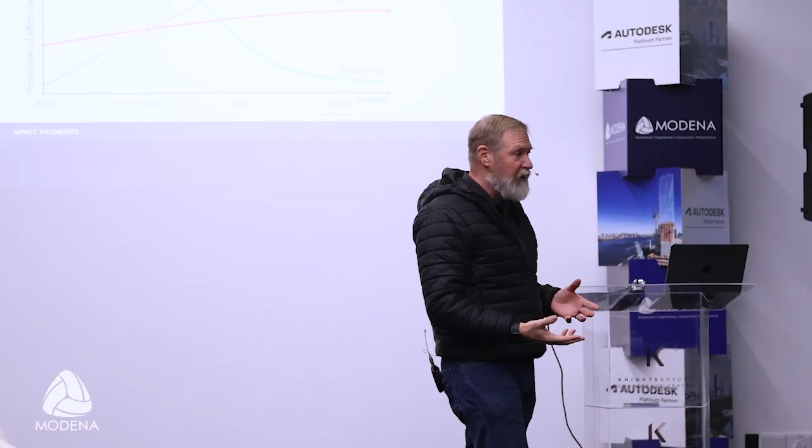That's going to continue, but it's not going to increase as fast as data. And when we talk about data, whenever I hear someone talking about data, I always want to say, what do you mean? What is data? Is it just ones and zeros? Is it documents? Is it pictures? Is it videos? Is it models? What is data? The answer is yes - it's all of those things.

But when that stuff is badly structured, it's not worth that line. And that line is important, because if that information and data is of good quality, then those bits over there that represent AI start working.

AI consumes data and reprocesses existing information to create new stuff. If you've used ChatGPT or Copilot or Claude or one of those things, if you've used it properly, you would have realized that garbage in really produces garbage out. I mean, that machine can do whatever it likes, and you wouldn't be any the wiser. But when you start using proper prompts, when you start feeding those algorithms with the information you wanted to use as raw material, you really get gold.

I've used that extensively in my research just for today. The augmentation of my knowledge on the subject and my ability to ask the right questions of the algorithm, and point it towards the right source data, meant that I could accumulate information that I'm going to present to you reliably, with cross-references that I checked, in a very short amount of time.

Now that's important, because we're very busy these days, and our projects are getting bigger and bigger. We have less and less time to faff around trying to find stuff. But it means that as we start leveraging technology, we've got to be cognizant of the quality of information and make sure that we spend a lot of effort in that space.

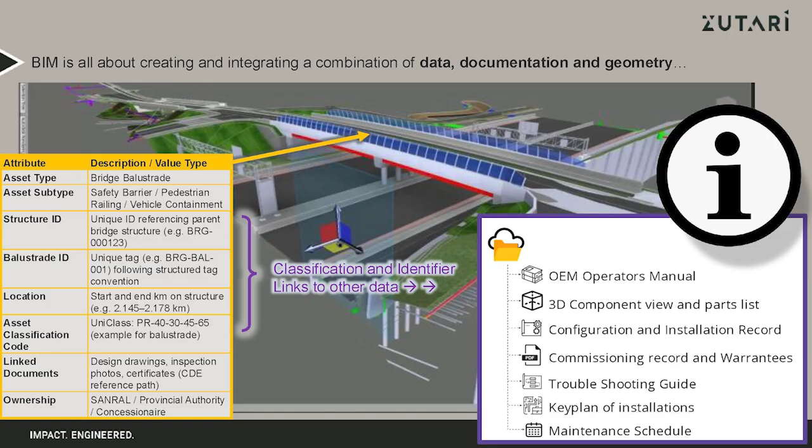When we start talking about asset information, it's a very interesting topic, because it's a term that we drop into our conversations, but do we really understand what it means? When we look at asset management as a concept, I think many people think facilities management or they think operations. Asset management is a very big topic.

Is anyone from an asset management background in the room? Any asset management? Thank you. Anyone else? All right, plug for you.

Asset managers look at everything, from before a project is even conceived till way after the project is finished and all of us walk away off-site.

That is the realm of asset management. It's understanding how we value and utilize everything that has been created. And so the realm of BIM really is concerned with how do we produce information that is useful in the asset management context. And asset information becomes a critical deliverable for all of our projects.

So we take something like that bridge balustrade. When the National Roads Agency needs to manage their assets and understand where a certain type of balustrade is present on our road network, if they were able to filter through all of their databases and understand where the F1 type balustrade has been used anywhere in the road network because there was suddenly a flaw in the manufacturing, that would be a game changer, as opposed to having to trawl through lots of papers, right?

Even roads. I'm a roads engineer, by the way. This is my happy place.

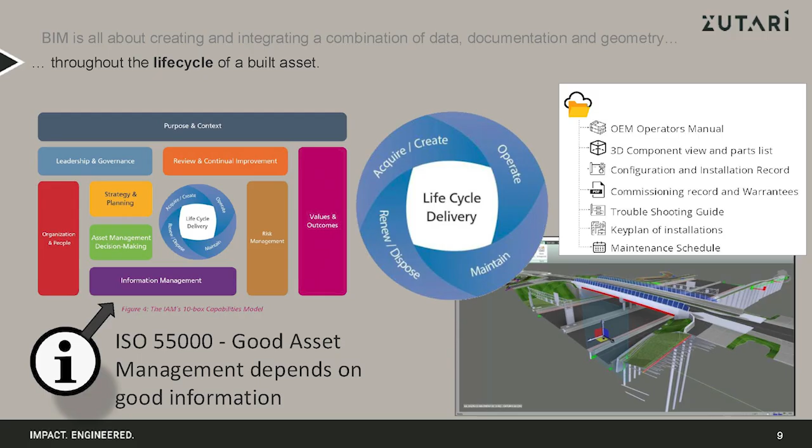Asset management has a very structured and very deliberate way of thinking about how it is done. Right at the bottom of that picture, it's a bit of an eye test for everyone, but this purple block says information management. And that blue cycle that I've enlarged over there is the asset life cycle. Most of us in the room, except for the asset manager, are involved in that blue ring. That's our primary focus, and I'm guessing most of us are involved with the creation of assets.

Who's not involved in the creation primarily, but in the operation of assets? Hands up? Sure. Pay attention to that, because the conversation today is very typical of where the industry is currently.

Most of us are concerned about creating assets. Many fewer of us are concerned about making those assets last. And BIM is about both creating and extending the life of assets. So as we start improving the way we produce information, we actually produce the raw materials for operations and for us to be able to maximize the value of assets. Asset management is about making sure that you get return on investment.

One of the sad things about South Africa is we're brilliant at making, we're not so good at keeping. And we need to get better at that.

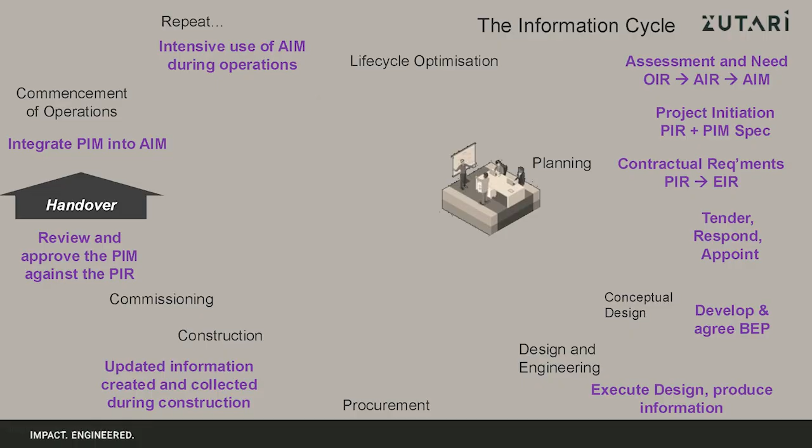There's probably going to be some debate around this point. Some people say the information gets pulled through from the very beginning in a continuous cycle all the way through. That is true, that is called a golden thread. But the information is replaced along the way and updated through a versioning process. The information that we as design engineers create to describe what must be built gets replaced by more up-to-date, more accurate, more correct information during construction.

And that is ultimately what's handed over. It's an important concept to grasp, because the process of project delivery in BIM is almost like a relay race, where different parties are receiving information from a previous phase and running the next leg of that race all the way through.

Through the construction and commissioning process, that information reaches its ultimate pinnacle. Because at the commissioning process, everything that could be known about that asset is known. And a month later, that team disperses, and all of the knowledge that hasn't been captured is lost forever. That is a critical point in history. If we don't capitalize on that moment of commissioning properly, you'll never regain it.

I'm working on a project right now where the client is paying a massive premium because they didn't anticipate this step. But fortunately they realized, and they have the capital to invest, they realized how important that would be. And it's so important that they're investing heavily in capturing that information before it gets lost.

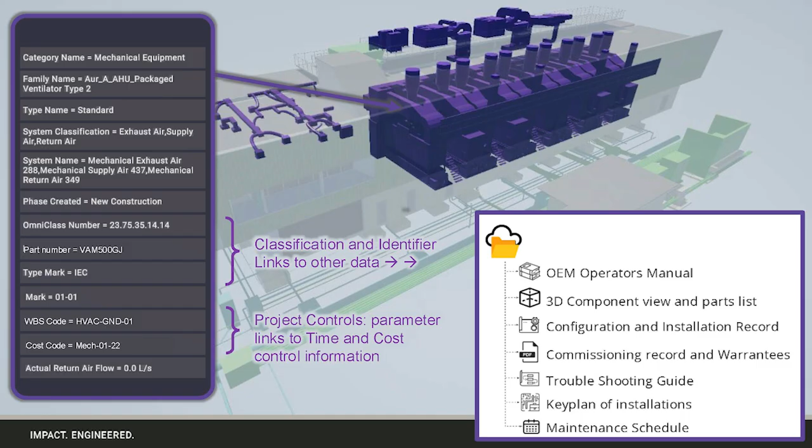Again, projects that we're involved with, where the client wants to do a digital twin - very exciting, everyone wants the digital twin. Digital twins are like that thing on that previous graph that needs to consume data. If the data is poor, digital twin's dead, period. And so this process of being able to create classified, organized, structured information is the beginning of a digital twin. If you don't do that, forget it.

It's a pretty picture. And being able to link documentation, information that describes the assets themselves, information that links to time and cost - you're wondering how to do 4D and 5D, right? Those of you who've heard 4D and 5D, two simple things: a WBS code and a cost code. Stick it in your parameters, you're sorted.

There's a lot of work down the line, but those two little things there unlock so much. The other ones, the classification identifiers, that unlocks your 6D and 7D. You've heard those things - we're going to talk about them now.

Let's compare 3D modeling with BIM. 3D modeling is creating pictures. So our artists used to do that ever since we could animate, and ever since you've been able to draw a 3D perspective, you've created 3D models.

Information modeling is about creating these things - it's about having a descriptive model that describes what you want to build, being able to connect that with information, documentation, specifications, being able to link it to project schedules so that you can actually see how far a project should be at certain stages. Incredibly effective if you've got multiple stages that need to work in the same spot.

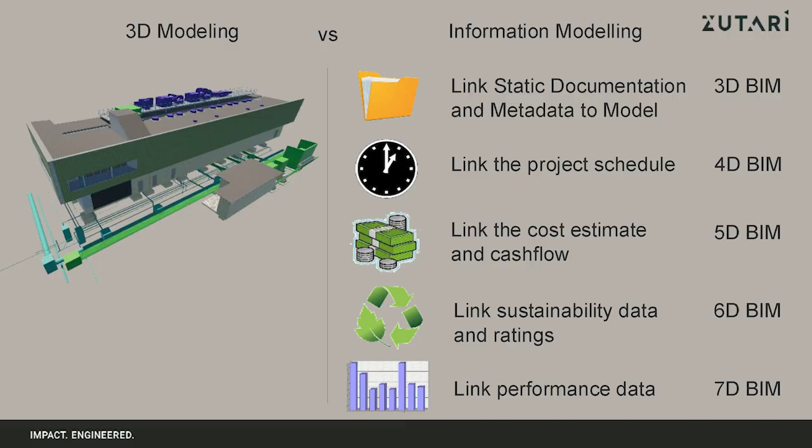Let's look at cash flow and visualizations. I have this picture in my mind of a cost controller, and instead of looking just through Gantt charts and schedules, they click on the payment certificate and up pops the model, color-coded to see what this payment certificate covers.

Clicking on a filter that says, show me the difference between last month and this month's payment certificate spatially. Show me that in terms of time - how much of that was supposed to be last month? Simple concept, two parameters in your model, and an awareness between your modeler and your scheduler. We should be doing this, people. It's not hard - or maybe it is, but you're just not aware of it.

Sustainability ratings - being able to filter through the components of your building and understand where the parts are that are contributing towards a poor or a good score. Being able to then use that information to selectively start replacing during its life cycle as new products become available, as new opportunities come to actually save.

And then asset performance and asset management - the amount of information we can collect and the computing power to process information about performance. In industrial applications, think of a SCADA system, which is like an industrial BMS, and how you can collect information from all over your plant, analyze that. We already do that, but that information sits on a red, amber, green dashboard. Being able to suck that into a database, analyze it for optimized opportunities, and then be able to visualize those scenarios - that's what that opens up.

Interesting thing is, in South Africa, we're not getting this in our tenders yet. The BIM community is working very hard to make sure you do, which means we need to get ready. The tricky thing about this conversation, speaking from a consultant's point of view, is we're essentially writing our own exam papers, and we need to get ready to write the exams ourselves. It's an interesting position to be in, but the privilege we have is we've got time to study, time to get ready. Today is about asking yourselves: what do I need to do to get ready? That's after lunch. But let's first look at what you need to be ready for.

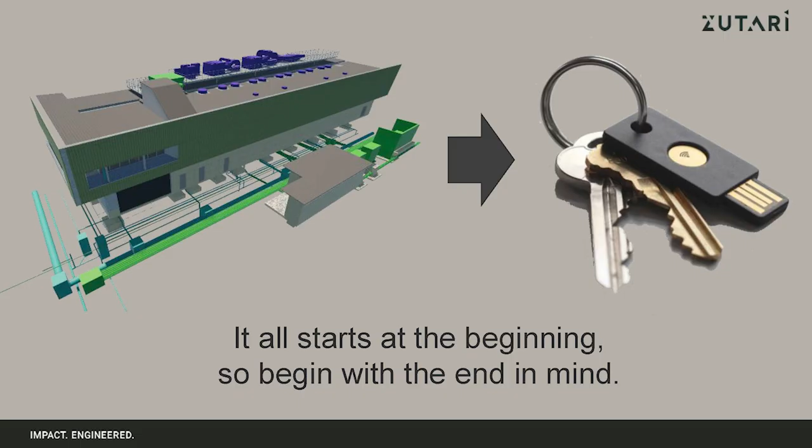So, I love this picture because a friend of mine called Andrew Mason always used to tell the story about engineers and architects that like to toss the keys over their shoulder as they walk out the door at commissioning, and it's the facilities manager's job to catch them and try and make something happen. And I said, well, wouldn't it be cool if that bunch of keys had a memory stick on it and had all the data? It's a very bad image, but I think it's just a reminder to me about how important it is to hand over the keys and the data. That bunch of keys, to me, represents the complete picture, the possession of the physical and the virtual.

All right. So here's a little story, and I'm going to ask at the end of these two stories which one you think is more realistic. So I'll read it to you because it's easier if you hear it.

The municipality of Nowhereyouknow commissions a new water tower to improve pressure for an expanding township. The consulting engineer delivers PDF drawings via email, flag number 1. The architect submits renders. Contractor receives a printed copy of the tender drawings during the site handover. 6 months into construction, the contractor discovers that the reinforcement details for the tower shaft conflict with the embedded starter bars shown on an outdated foundation drawing.

The structural engineer is on leave. The updated drawings are buried in an email thread. The clerk of works is left guessing which version to follow. No one has a consolidated model, and information lives in different silos: emails, desktops, Dropbox folders. Site instructions are handwritten.

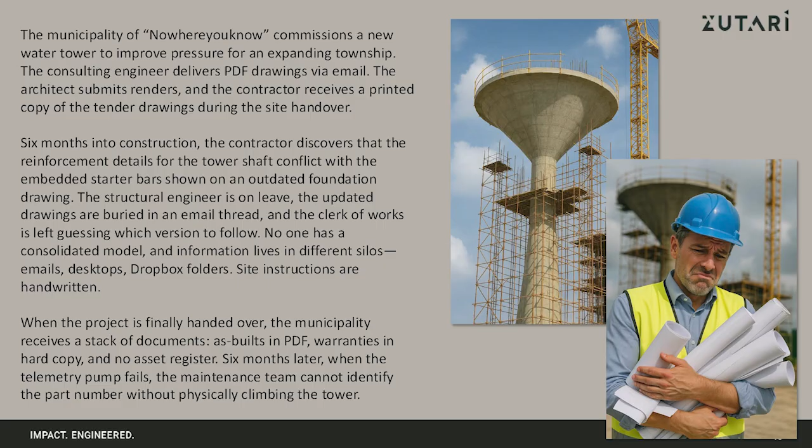They do finish the project, and when it's finally handed over, the municipality receives a stack of documents, as-built in PDF, warranties in hard copy, no asset register. And guess what? 6 months later, when the telemetry pump fails, the maintenance team cannot identify the part number without physically climbing the tower. Never happens like that.

A couple of years later, the municipality attended this workshop and they thought, we've got to do something different. And they undertake another water tower, this time guided by a newly adopted digital delivery strategy. They developed a standardized employer's information requirement document, supported with a digital advisor, and appointed a BIM coordinator within the consulting team. During the design, the consultant team works in a shared common data environment. The 3D model of the tower includes LOD 300 geometry with embedded asset tags for pumps, ladders, access hatches, and valves. Project manager, quantity surveyor, and contractor all access a coordinated model using Navisworks and BIM 360, or whatever they were using.

Clash detection is run before going to site. Drawings are extracted directly from the federated model. During construction, the resident engineer uses a tablet to view the latest model, and all RFIs and technical queries are logged and tracked in the common data environment.

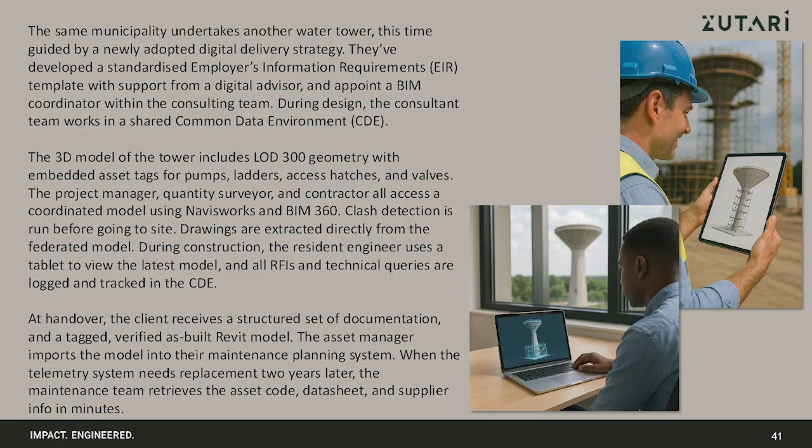At handover, the client receives a structured set of documentation and a tagged, verified as-built Revit model. Asset manager imports the model into their maintenance planning system. When the telemetry system needs replacing 2 years later, the maintenance team retrieves the asset code, the data sheet, and the supplier information in minutes. Never happens that way either, does it?

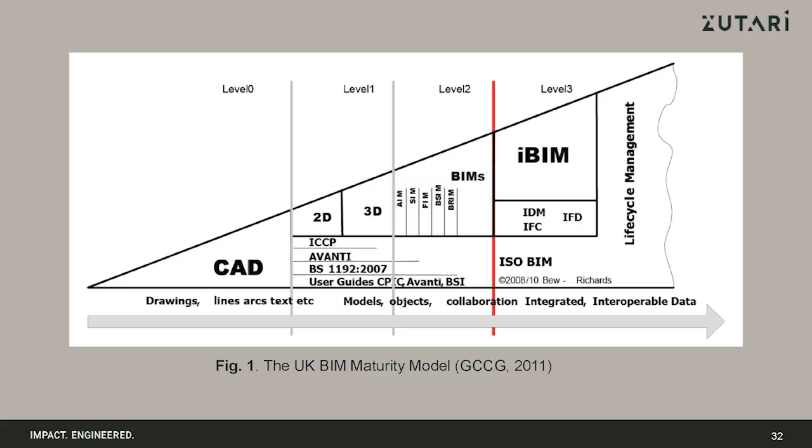And this picture relates to a whole bunch of different models. Anyone seen the other models? I know you have, yeah, that's our favorite guy. But it's very complicated. So this is much easier to understand.

So this is what we're going to be talking about after lunch: how do we position the various different options, from not doing anything at all over here, to bare minimum - we have to get that right. This is probably where we're going to end up, and in a few years' time, we'll be there.

And so if we start looking at our little 3 bears, I thought I had to just put a little bit of theory in here just to prove that we're not sucking our thumbs too hard. But if we take pre-BIM, baby, mama, and papa, you can see that it aligns very nicely with a number of different paradigms. If we go through them one by one: level 0, pre-BIM, totally unmanaged CAD, no structured information, no CDE, working in 2D CAD, no modeling, disconnected stuff, no workflows. Pretty much sounds like pre-BIM, right?

Baby bear, okay, so now we're starting to get managed CAD, all right? Don't need Revit to do BIM. You can have managed CAD, properly defined line styles, properly defined levels, naming conventions on your cells and components. It's all possible in CAD. Even MicroStation can do that.

Ad hoc project information, simple CDE. Okay, we're all working in SharePoint. We're all working in Aconex.